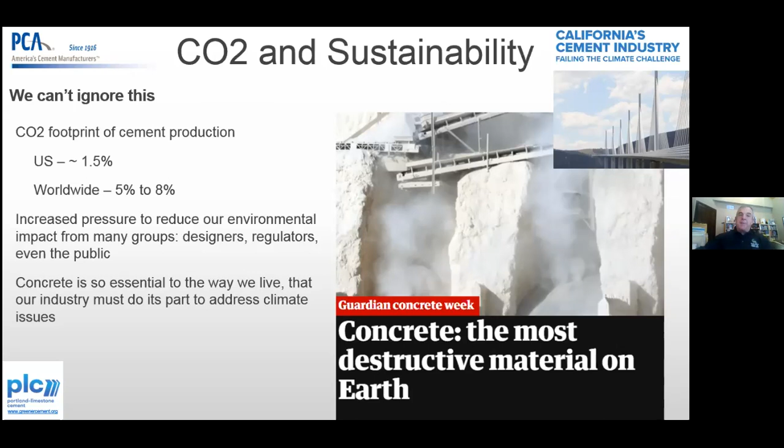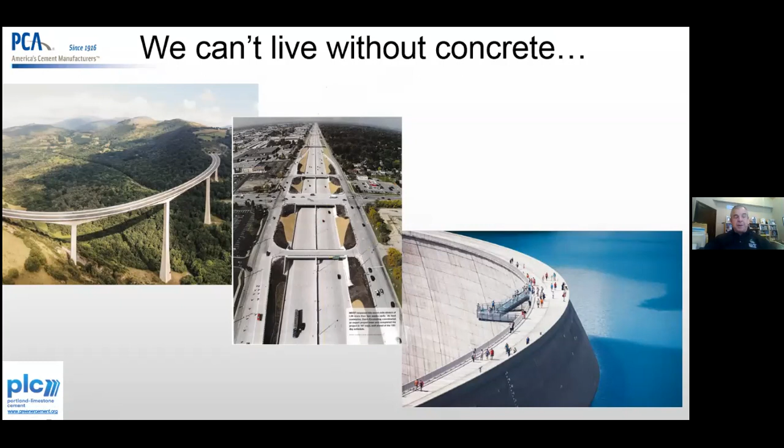The problem is we can't really live without concrete. Concrete frames our infrastructure, concrete frames our homes, concrete's resilient, it's durable, it carries our water, it carries our sewage, it provides comfort, and we need concrete. It's an essential building material that, as the story goes, is the second most consumed material on planet Earth per capita. So we have to do something about it.

In 2018, the Global Cement and Concrete Association was formed in London, the UK. It's a group of companies, and I'm going to show it in a second. We realized that we're part of the problem. We're also part of the solution, and we're confident that we can achieve this global commitment.

The global commitment basically says that we're going to continue to drive down the CO2 footprint of our operations and products, and deliver society carbon neutral concrete by 2050. It's only 30 years away, and of course carbon neutral means zero carbon. I'm going to show you the pinwheel in a second, but it's across the built environment value chain, which means it's in concrete, it's in structures, it involves a circular economy, and it goes through the life cycle of the building.

Just as a quick comparison, anybody with a wooden deck compared to a concrete driveway, you don't do anything to the concrete driveway or deck. But you have to resurface and most often replace the wood deck, and it only lasts 10 to 15 to 20 years, whereas your pavements and slabs are going to last 50 to 70 to 100 years. So you have to take it across that metric, across the life cycle of the concrete, and recognize that it's not cement we're putting down, it's concrete.

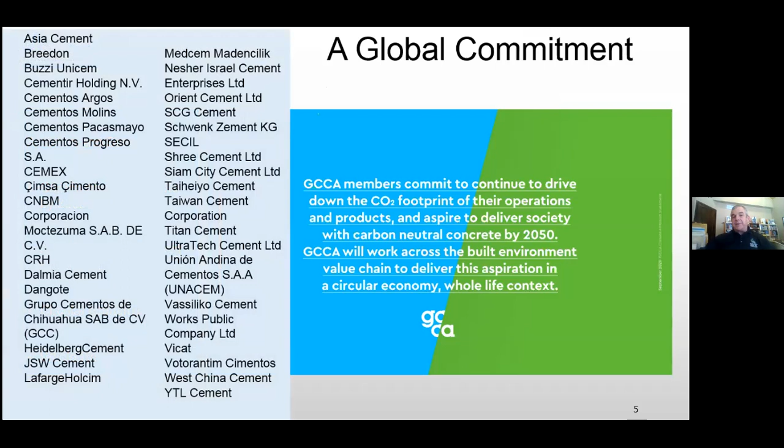So we framed it out. CEMBUREAU, obviously in Europe, GCCA started in Europe, and they framed it out in what we call the 5 C's. So we call it cement, concrete, construction, and clinker. Actually, we break it out into clinker, cement, concrete, construction, and then carbonation is broken out separately here in North America. These are the 4 C's, I guess, then.

So in clinker, I'm not going to dwell on it, but we've got thermal efficiencies where we can achieve certain numbers. We've got low carbon clinker, biomass fuels, decarbonated raw materials.

Carbonation construction is basically using higher performance concretes to get lower masses of concrete in structures, to use less. Concrete can be improved by concrete mix designs, moving from prescriptive mix designs more towards performance mix designs. The NRMCA is basically working hard to achieve this and to convince specifiers that that's the right way to specify concrete.

And of course, on the cement side, we've got our work cut out for us. Clinker substitution is the biggest, it's the lion's share of the reduction that we need to go from, and the baseline is 1990 emissions of 783 kilograms of CO2 per ton of cement. Up to this point, to 2017, which is where they're starting from to get to their 2030 numbers, we've already achieved 116 kilograms per ton reduction in CO2.

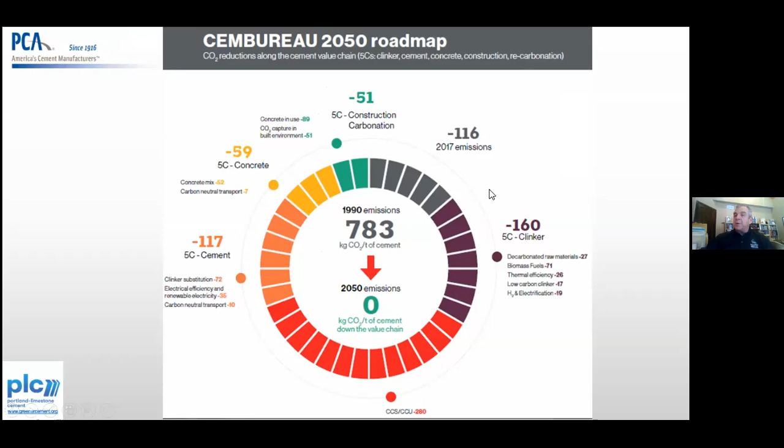So they broke it out, and right now we're adopting a 2030 target, so 10 years from now, we have a benchmark to get to. Similar things are going on in North America. Same framework is happening at the Portland Cement Association, and we just started earlier this week with the Cement Association in Canada and the National Research Council in Canada. We're going to follow a roadmap very similar to what CEMBUREAU is following.

Again, this is still CEMBUREAU's roadmap, but they say in order to get to zero by 2050, they have to get to 472 by 2030. The way they're going to achieve that is through clinker, cement, concrete, and carbonation, recarbonation, and construction. My discussion today, my conversation with you, is basically about cement, and 2/3 of that is through clinker substitution.

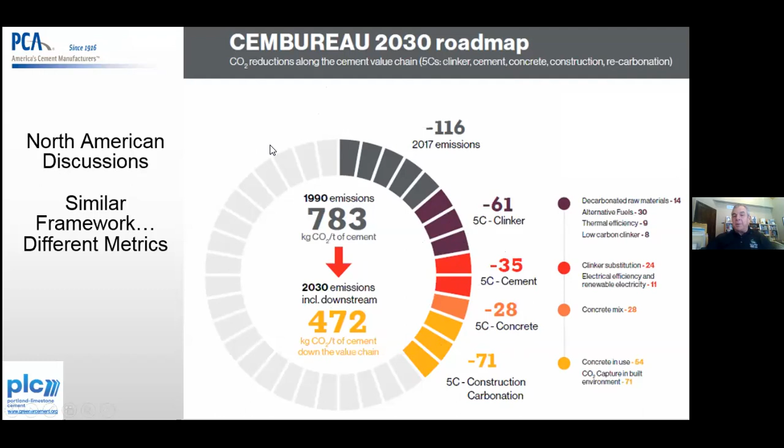The rest is going to come through electrical efficiency and renewable energy at the cement plants. That's in Europe, that's their job. We're coming up with the numbers we need here in North America, but we know it's going to be a challenge. So a lot of us know right now, to get from this point to this point, baseline to low carbon binders in concrete.

Because it's concrete that we're talking about, right? It's not cement. You don't place a cement driveway, you don't place cement walls, you don't place cement slabs, you place concrete. Concrete is the material where we have to consider the end use. And so this is the point where we're at right now.

Right now we use supplementary cementitious materials to replace Portland cement in concrete. So what used to be the baseline of 384 kilograms carbon dioxide per equivalent cubic meter, we're reducing that by using supplementary cementitious materials, fly ash, slag, for example. But we can achieve another 10% reduction of the embodied CO2 by using Portland limestone cements.

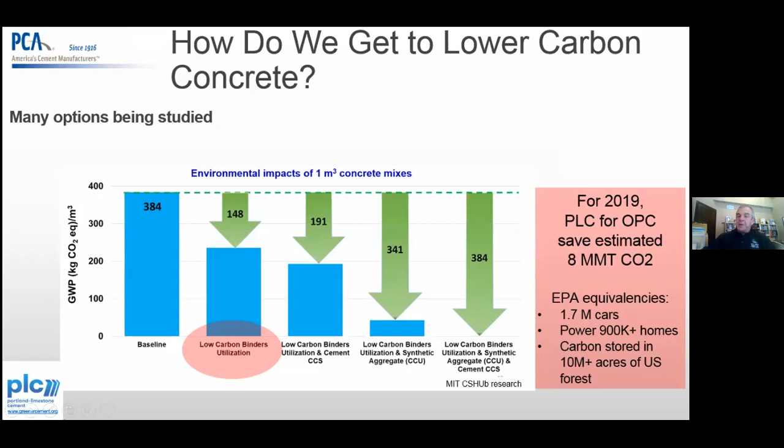So in Portland limestone cements, I'm going to explain in just a minute, but in 2019, if we were to utilize Portland limestone cement instead of ordinary Portland cement, we would have saved 8 million metric tons of carbon dioxide, which is equivalent to 1.7 million cars off the road, enough to power 900,000 homes, and it's basically the carbon stored in 10 million plus acres of US forest.

So I mentioned earlier on that we shouldn't use the metric for cement. Cement obviously has a higher embodied CO2. If you look across this one on the left axis, or the vertical axis, you'll see that it's almost a 1-for-1 ratio, a ton of CO2 per ton of cement produced.

It's actually 0.85 or 0.83, the industry average that was calculated a few years ago, 5 years ago, and we're looking at redoing that right now. But when you look at it compared to timber, we embody less energy, but we have a higher CO2 footprint, embodied footprint. Compared to asphalt, it's about the same as far as embodied energy goes, but again, because of our process, we have a higher embodied carbon footprint. Still much less than plastics, bitumen, glass. Steel is, you know, highly recyclable now, so it's viewed differently now, but it's not bad as cement.

And the story really is in concrete, where once you place it with aggregates, cement only forms 15% of the concrete mix, then your embodied CO2 drops dramatically and your embodied energy drops dramatically. So we do have a good story to tell, but it goes to the total amount of material that's used. And because we're the second most consumed material next to water per capita in the world, you multiply it by the sheer numbers, the amount of material consumed, and that's why you end up with the black eye that we're getting.

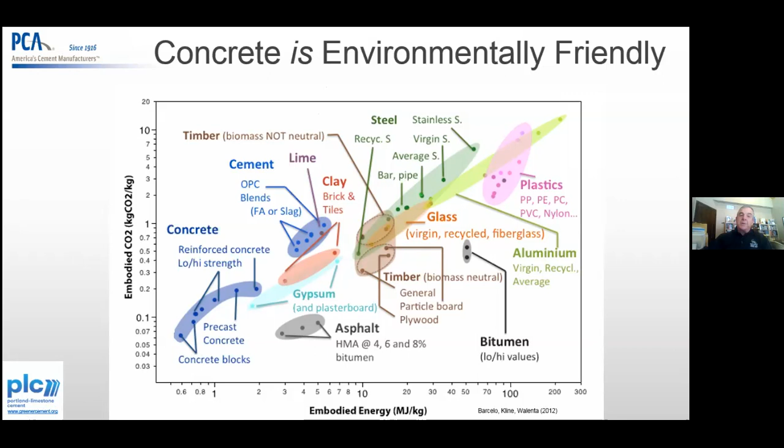In the United States, we have several standards governing cements: type 1, type 2, 3, and 4. For blended cements, we have Portland Pozzolan, Portland slag cement, 1P, 1S, Portland limestone cement, and the ternary cements. They allow for pozzolan, slag cement, and limestone. So blended cements is really where 1L resides right now in specifications.

Hydraulic cements, the C-1157, was purely a performance specification developed years and years ago. It permits the use of several different materials—pozzolan, slags, limestones—but doesn't specify the chemical constituents or prescriptive requirements of the other two specifications. It really is more of a performance specification, and hasn't really been adopted or embraced like people had hoped.

So it still resides in the specifications, but it's not really used all that often. C94 really has equal recognition of all the cement standards. And then, of course, there are separate supplementary cementitious material specifications, ASTM C618, for example, or C989 for slag.

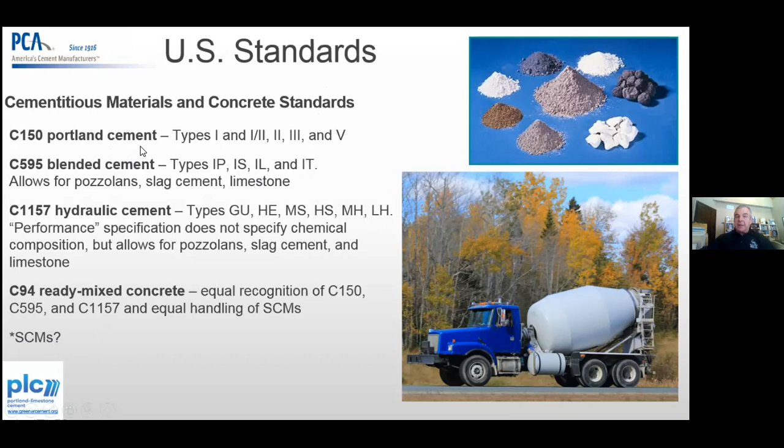The blended cement specification has been around for a long time, over 50 years. C150 has undergone quite a number of changes over the past 20, 15 years. In 1992, 1157 came out with the first attempt to come up with something more environmentally friendly, and it still hasn't gained traction. Portland Cement has made some changes in the C150 realm.

In 2004, we were able to add up to 5% limestone addition. In 2007 and 2009, some changes for inorganic processing additions were recognized, where you can use slag, fly ash, or other materials, whether organic or inorganic—but just addressing inorganic—you can add up to 5%.

So with limestone addition, with inorganic processing additions, each being at 5%, your gypsum being approximately 3 to 5—let's just ballpark it at 5—your clinker factor went from 95 to 85, and it's still not good enough to get where we need to go, unfortunately. And as I said, blended cement's been around for a long time, since 1967, so almost 50 years.

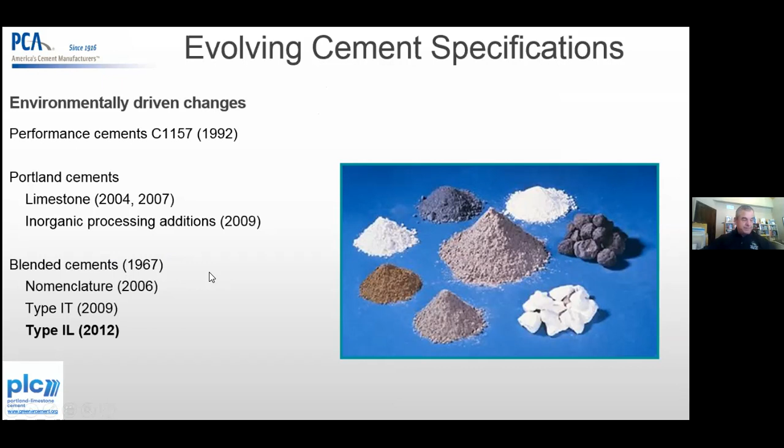So Portland limestone cements, it's a blended cement with additional limestone content up to 15%. Right now the Portland cement specs and the blended cement specs permit limestone up to 5%, but your Portland limestone cement is up to 15%. And it's a quick way to reduce the carbon footprint by 10%.

It's suitable for buildings, bridges, pavements, geotechnical applications. And it is becoming more available throughout the US, and right now it's readily available coast to coast. In Canada, it's pretty well almost the dominant cement. I think just this past year it surpassed it—we don't have the statistics on it yet, but that's kind of where we're at.

The Portland Cement Association actually has come out with a website called greenercement.org, www.greenercement.org, where it has some background information, some field tests, some calculators—well, I say calculators, it has some background information. It has the information we hope will enable you to promote the product and use the product better.

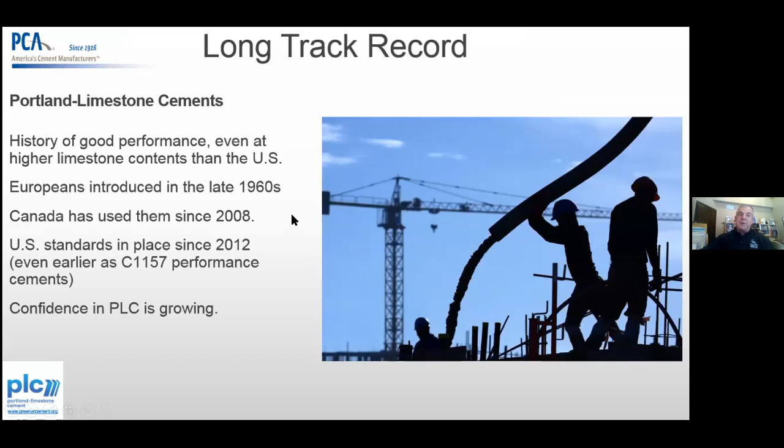Canada adopted it in 2008, so it's been in place for about 12 years. The U.S. standards put it into play in the specifications in 2012. Some of you may know it was actually marketed as an 1157 prior to 2012, for about 10 years before that, probably in most Western states. An IL cement was sold as a GUL, or I believe a GU performance cement, and marketed for a number of years, but now it's found a home in C595.

Going back to the Canadian exposure to it, it came in 2008, and again in AASHTO and ASTM in 2012. AASHTO and ASTM are harmonized these days, so it's pretty well one for one.

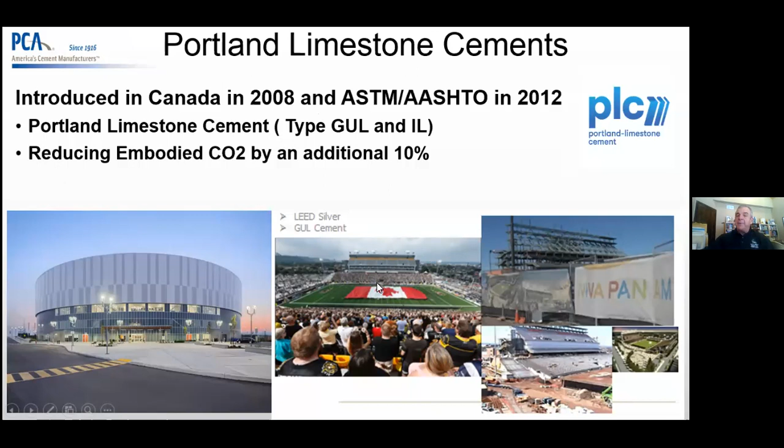Here you've got a couple of projects done in 2015, seven years after the introduction of Portland limestone cements in Canada. You've got the Mattamy Velodrome on the left. Both were LEED silver projects, mandated to be LEED silver. To get that, they needed to meet certain requirements, but they also wanted to have GUL cement used as the sole cementing material in the project. The first was the Mattamy Velodrome for the Pan Am Games, and the second is the Toronto Football Club, TFC Stadium, also constructed with GUL cement in 2015.

But it wasn't all roses. At the outset, we had concerns. Just because it's done in Europe and South America doesn't mean we're willing to accept it in Canada. As cement manufacturers and concrete producers, we had to make sure we were doing the right thing. We wanted to make sure that if we're promoting this product, it's not going to give us a black eye. We wanted to make sure it was going to perform.

We wanted to make sure it was going to be freeze-thaw resistant, and that we were doing the right thing by making it and promoting it. So we had to do our own work. One of the things we did, Professor Hooton at the University of Toronto proposed a field site.

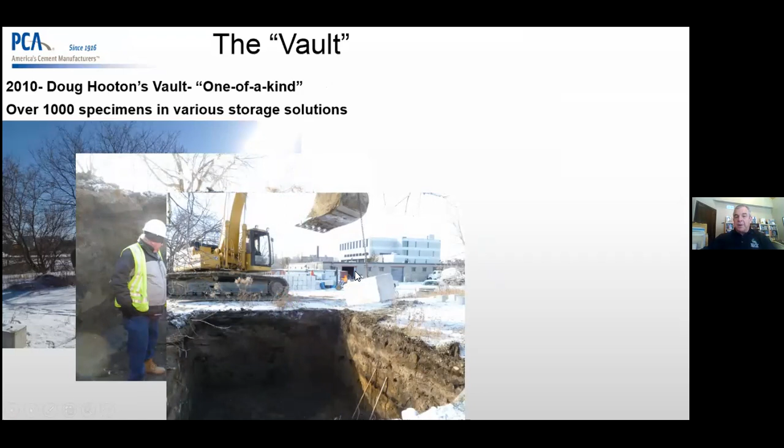We offered up the field site to them. We brought in an excavator—that's Doug on the left here with a couple of his students after the hole was dug. We put blocks in, lined it with blocks. That's the Toronto office in the background. They gave us a little piece of land here right by the railroad tracks, real nice of them.

But anyhow, we made it work. We lined it with blocks, put some framework in there to make sure the material was protected from above. Doug and his students ended up putting over 1,000 specimens into this storage field site, the vault, as we call it. He has several different specimens.

This went on starting in 2010. He's got specimens in there that are in calcium chloride solution, sodium sulfate solution, and magnesium sulfate solution. Doug is a big durability expert on sulfate deterioration and damage, and alkali-silica reactivity too, but that wasn't conducted here. He wanted a long-term storage site, so we provided it to him.

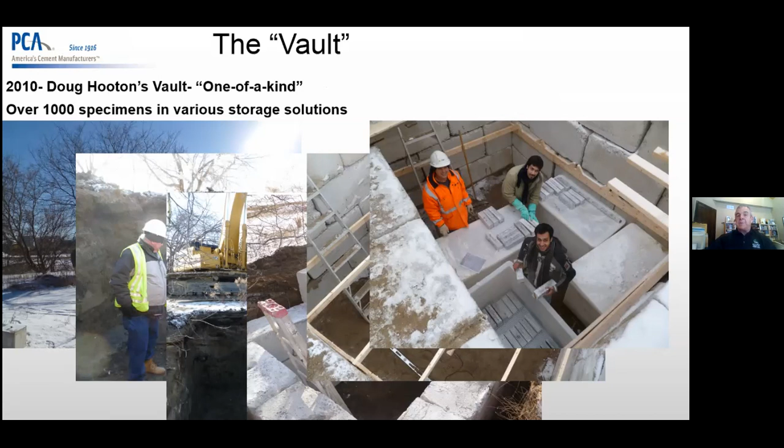The only thing we need to do every year is bring the loader and forklift out and bring these specimens in once a year. Doug has his students measure them and they put them back in. We've got specimens at 0.4, 0.5, 0.6, 0.7 water-cement ratio, different levels of fly ash and slag, in different storage solutions—it's one of a kind. There's nothing else like it in the world, and it's been going on for 10 years. Then we just cover it back up every year until we have to open the tomb up again the next year.

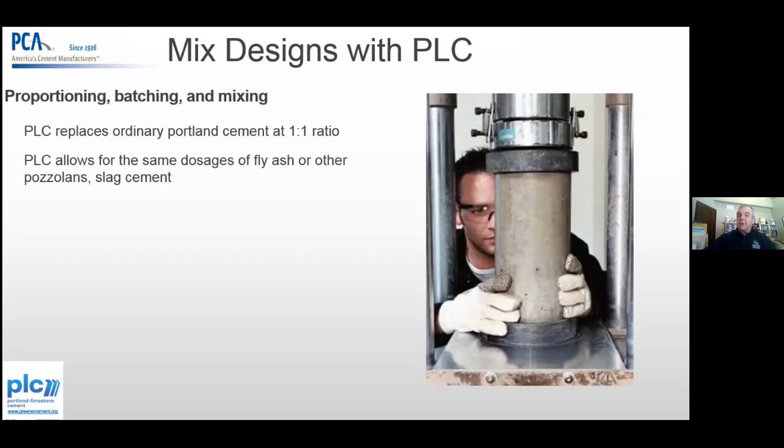So far, and I'll get into his results in a little bit, mix designs with PLC—everybody asks us, what do you do? Well, our experience, which we verified, is that you just replace ordinary Portland cement at a 1-to-1 ratio. There's no compensating for anything else. We've discovered you can use the exact same replacement levels of fly ash, slag, or other pozzolans without issue.

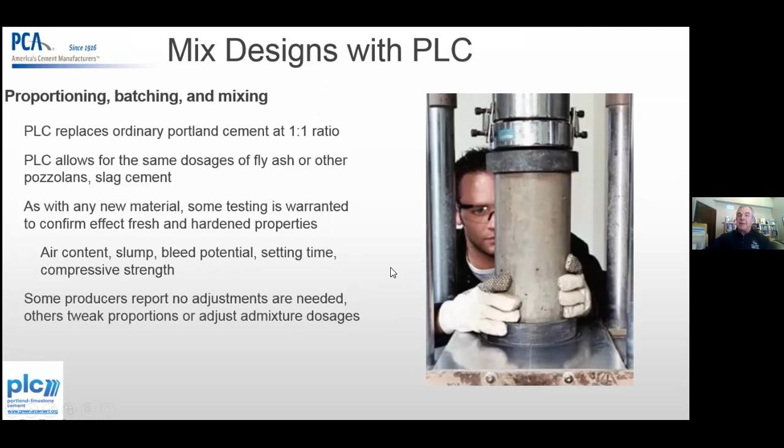Just like with any material, if you change a cement source, or a slag or fly ash source, you've got to do your testing—air, slump, bleed, set time, compressive strength—to make sure everything is dialed in. But typically if you're on one source of material and convert to another source that's PLC, there shouldn't be an issue. Most producers have reported no adjustments. We've heard from some that there might be a slight admixture dosage adjustment for slump, but other than that, it's been a flawless sort of change.

But like I said, it took years to do it. We had to build that field exposure site, do a lot of test pavements, a lot of barrier wall, flat work, sidewalks. We did a whole bunch of demonstration projects to convince ourselves that it's the right thing.

Typical effects on fresh and hardened properties, workability.

Okay, do we take questions afterwards, or Dan, right? I don't know if there are any questions or not, but no questions right now. Okay. If you get any, feel free to interrupt if you want. I'm okay with that. Sure.

Okay, on fresh and hardened properties, just on workability, there's no significant difference. Bleeding: because there's a higher level of fines, since limestone preferentially grinds finer than the Portland cement clinker, you have more fines in it, and you might get a little less bleeding.

But most people say that the workability is enhanced by that. It appears like there's less bleeding and less workability, but once you start working it, it finishes even better, they say. Set time: there might be a slight decrease, only because you're optimizing your particle packing and fineness, with limestone fines filling the gaps between Portland cement particles.

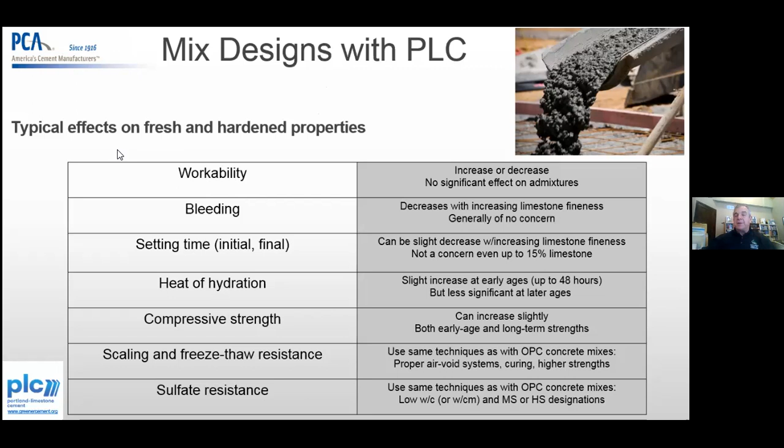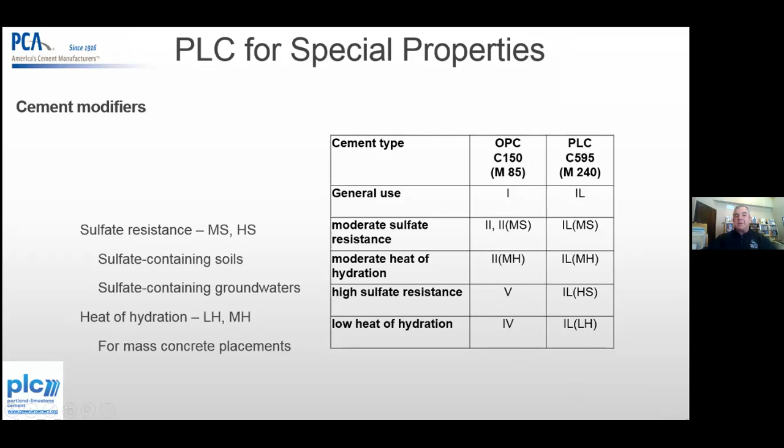The specifications actually allow you to use a IL cement as an MS as well - moderate sulfate resistance, similarly to a Portland cement - and you can have high sulfate resistance just as with ordinary Portland cement, or low heat of hydration, IL(LH), similar to a low heat of hydration type 4 cement. Same thing with moderate heat too. So the performance specifications in 150 can be matched with similar performance specifications in 595 or M240 for AASHTO.

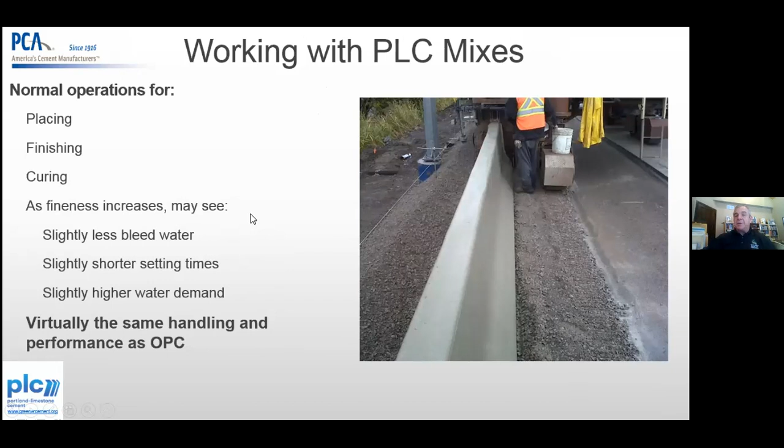The other thing for placing, finishing, curing, as I said before, the handling is really the same. There's really no difference between ordinary Portland cement and PLC in concrete mixes.

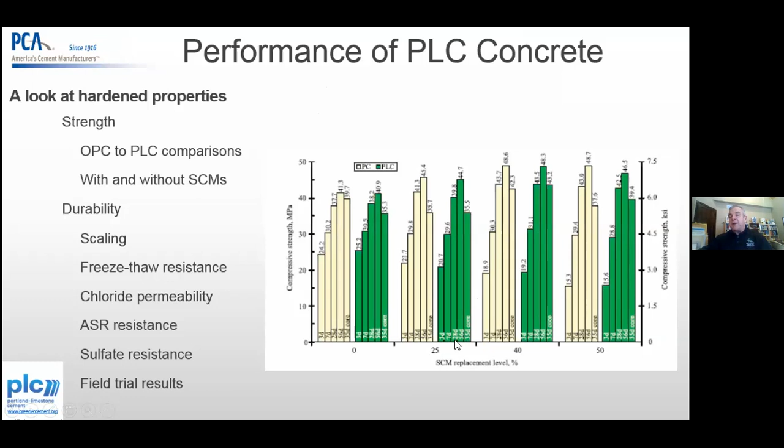I think they're 91 days, maybe it's something else - I can't really read that - but it's similar across the board for 0 replacement, 25% slag, 40% slag, and 50% slag in this particular graph.

I wouldn't hang my hat on the fact that you're going to get increased strengths all the time. My experience has been you get equal performance. This is basically saying that you're getting equal performance - it just so happened in this particular test that Portland limestone cement performed better than Portland cement, which you might find, but it should be equal. That's our goal - to grind them and optimize the intergrinding and gypsum addition to maximize efficiencies in the mills and maximize limestone content, but still get equal performance.

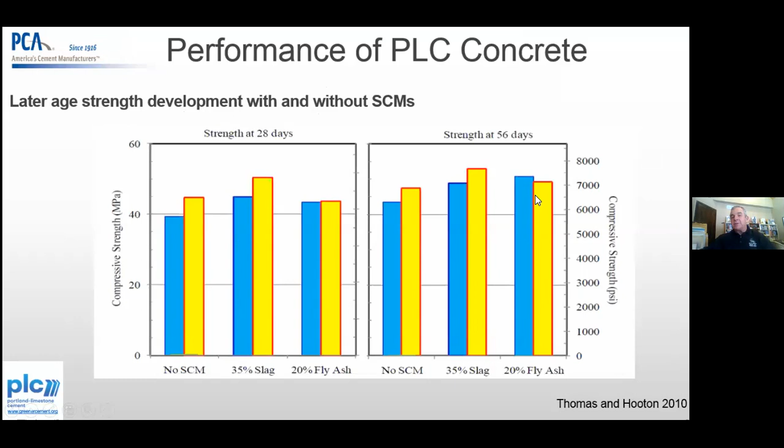At later ages, the same thing happens - you've got equal performance, for no SCMs, 35% slag, and 20% fly ash. At 56 days, the same thing: increased performance for Portland limestone cements, and for the 20% fly ash, just slightly diminished in this particular one at 56 days.

Permeability, the C1202 or the T277 test. Without SCMs, you're going to get higher permeability numbers, always, because of the pore solution, your calcium hydroxide pore solution. That's known. But once you start adding pozzolans or supplementary cementing materials, you end up reducing your permeability to levels where you can meet specification requirements.

So at 28 days, it's comparable at 35% slag, below 1,000 coulombs for this test. This is at 0.45 water cement ratio. What was 2,500 coulombs is now below 1,000. And with the 20% fly ash, it's about 1,250 and 1,400 coulombs with the PC and the PLC.

At 56 days, it doesn't really drop that dramatically for the non-SCM mix. Water cement ratio obviously plays a part in that, but just by adding in some supplementaries with PLC and with OPC, you get the same thing. You get equal performance and permeability mitigation.

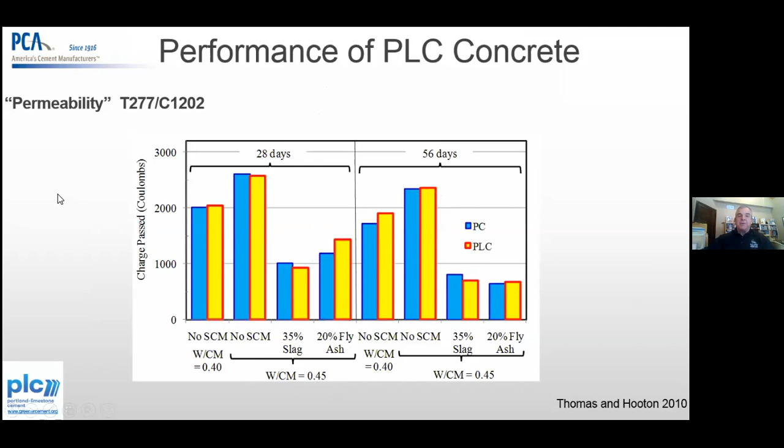Scaling resistance, they're equal. In this particular case, the one with PC and slag actually had higher scaling or slab defects, and the one with PLC had slightly less. And of course, they're all well below the mass loss limit anyhow. I believe it's 0.8 and 1 kilograms, so 1,000 grams and 800 grams is the limit for 50 cycles of exposure. And with the fly ash, same thing with the PC. That one particular worked a little bit better than it did with the PLC for this fly ash, but still they're well below the limits permitted in 672.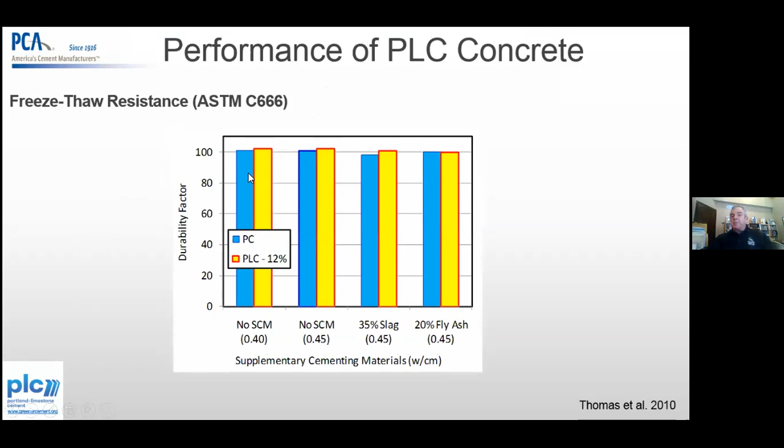This was just a 1-year shot. I don't have the update for this, it's like 10 years ago. Actually, this trial by Hooton and Thomas was done in Quebec in 2005, even before it got into the specification in 2008 in Canada. It was done in Quebec, and that pavement's been down, with no reported issues.

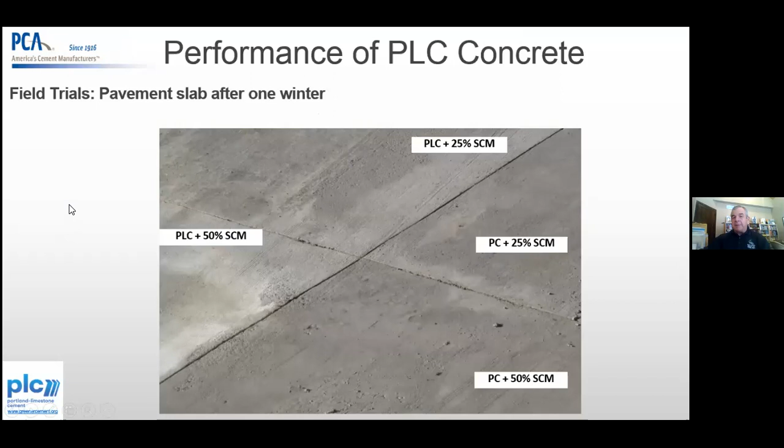Portland cement, and they basically just kind of abutted against one another. Portland cement and 50% slag, PLC and 50%, PLC and 25%, and PC and 25%, and no scaling issues whatsoever. Anybody who's been to Montreal knows they get freezing rain, they get cold, they get snow, and it can be pretty nasty sometimes.

And then ASR resistance, you get good mitigation with your concrete prism tests, your accelerated mortar bar test, and your accelerated concrete prism test, which they were trying to promote at one point, it's still in the research stages, but equivalent performance in ASR as well.

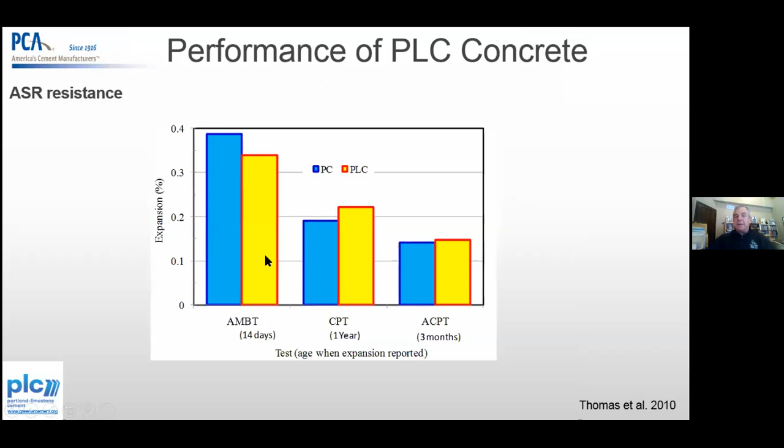This is for, I can't read that stupid thing. Hang on a second, stop it. I'm gonna go back, I can't read what it says up top. My screen is... what is that one? Give me a second here. My menu is on top of it and I can't get it off.

It says PLC and sulfate resistance. Oh, sulfate resistance, there you go. That makes perfect sense, because typically, and I showed that already with sulfate resistance, if you put any sort of mortar bars or paste bars into a sodium sulfate solution, it's going to skyrocket. They typically do take off, whether it's Portland cement or Portland limestone cement. But once you start adding supplementary cementitious materials that consume the calcium hydroxide in pore solution, you just get it flatlines, and you get below the maximum required to demonstrate that it's resistant to sulfates. That was the reason why Doug wanted the field site in the first place, was to demonstrate his big concern was sulfate performance and sulfate resistance.

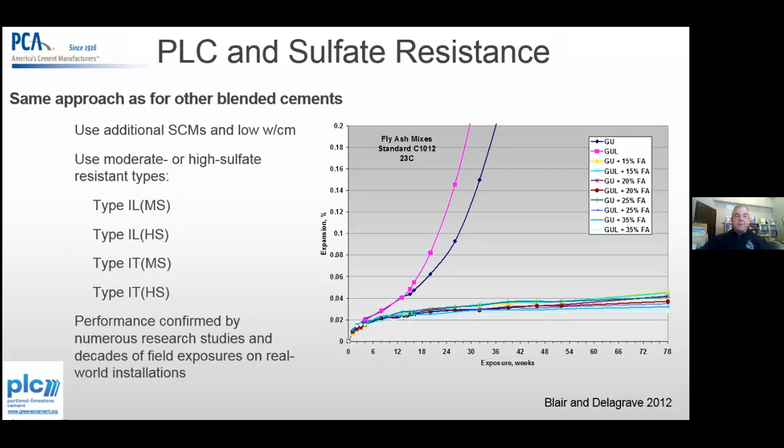And basically, how do you order it? Is it available? The only thing, again, I said, and it's true, it's just a replacement of 1-to-1 OPC with Portland limestone cement. Same suppliers that you use for your ready mix operations now, same delivery placing equipment, same pneumatic tankers, et cetera. The only thing that we had as an issue was logistics. You've got to get it from the plant, you've got to separate it out, you've got to get it to the terminals, or you've got to get it to your customer who needs a separate silo for it.

We have co-shipped product with both products. Portland limestone in one load and Portland cement in the other, and they co-shipped the same job because they had to, they had no choice. And at the end of the day, the concrete finisher didn't even know there was a difference in the concrete. He finished it all, 500 meters from one plant, 500 meters from another, and didn't have an issue with it.

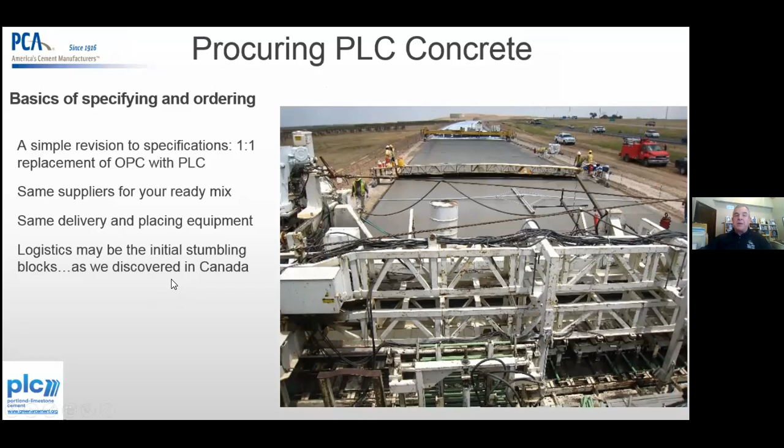So it's really just logistics in separating out the products and making sure that you're sending the customer what he needs, right? So just some simple calculations that I did with our ready-mix affiliate in Canada. They've been the most progressive, although the entire industry is moving that way right now.

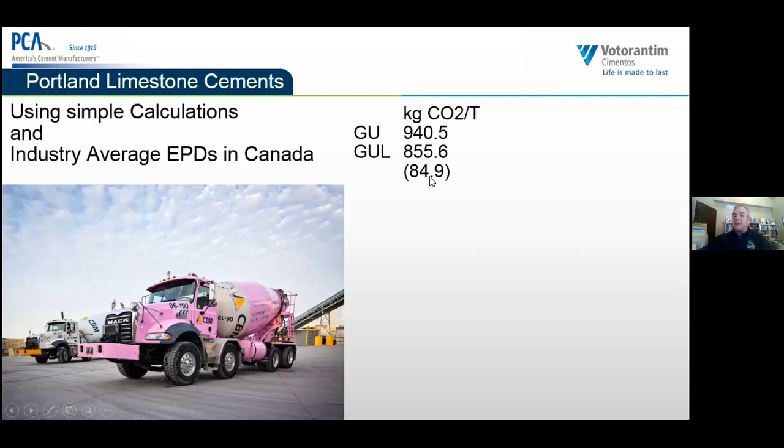If I use the EPDs, Environmental Product Declarations, from the Cement Association of Canada, we did establish an industry average of CO2 per ton for GUL and GU, and the difference being 85 kilograms of CO2 per ton of cement is a differential. I just basically took the numbers that CBM has used over the past 3 years, and CBM in their usage of GUL cement basically saved 6.9 million kilograms of CO2 from going up into the atmosphere.

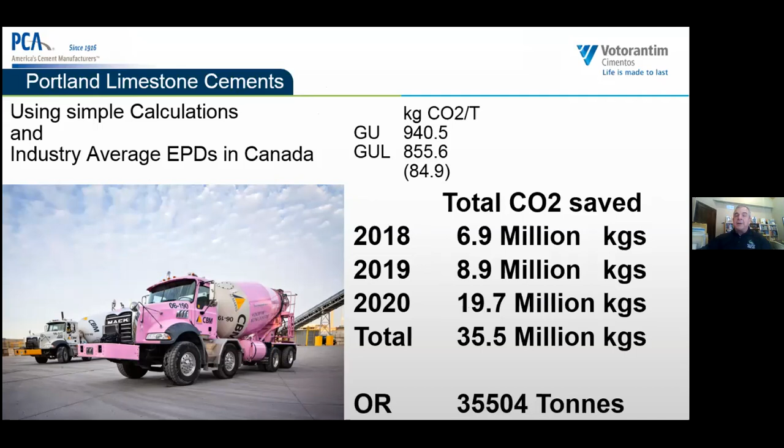8.9 million in 2019, and last year was absolutely stellar - almost 20 million kilograms of CO2 was prevented from going up into the atmosphere. In effect, in the past 3 years, over 35 million kilograms, or 35,000 tons of CO2, was prevented from going up into the atmosphere. And that's just one client, one customer. That demonstrates that hits home.

So we've had some end users actually ask us, okay, if I were to use this material on a particular job, what would I get? So, EllisDon has a project going on - it's the wastewater treatment plant in Hamilton. They use GUL entirely for the project. It's 23,000 cubic meters, or 30,000 cubic yards, with slag replacements 30 to 45. There's a YouTube project update link on this.

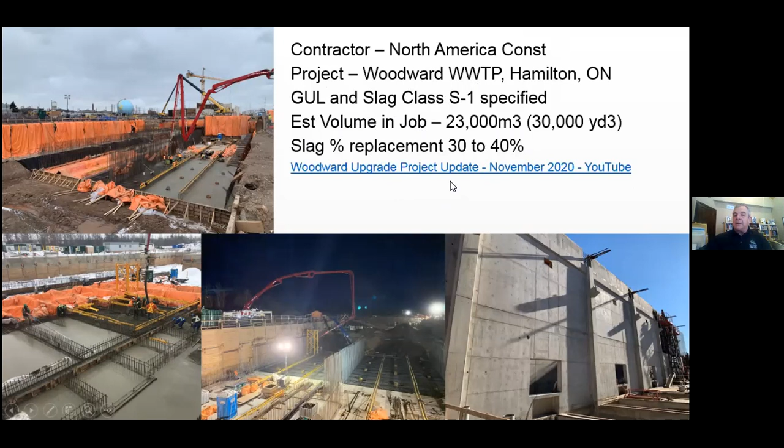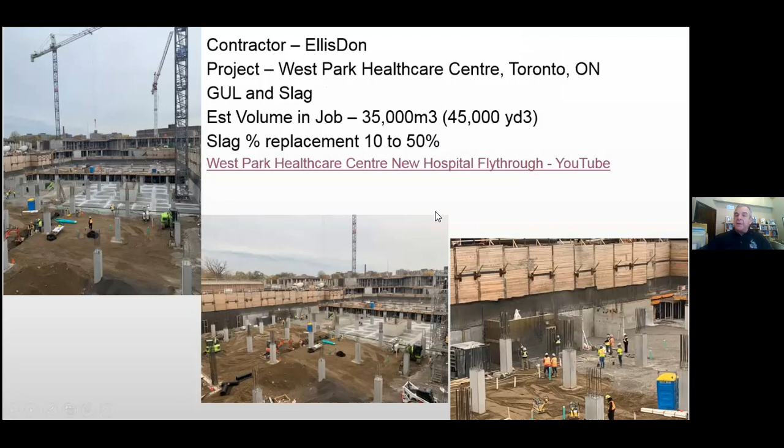Another big project that's going on right now, the healthcare West Park Healthcare Centre. Again, GUL cement with slag, 45,000 cubic yards being used in that one, 10 to 50%, depending on the application where the concrete is going.

So EllisDon wanted to know, hey, if I were to use 25,000 cubic yards in a 5,000 PSI mix, what am I saving by doing this? The Slag Cement Association has a calculator - it's verified, certified. Pretty soon, by the end of this year or the middle of this year, we are going to have everything in one location. I believe the Slag Cement Association calculator is going to have, instead of just Portland cement in it, Portland limestone cement too.

But until then, you got to use two different calculators. I hate to say it. So the guys asked me, hey, if I use 25% slag or 35% slag, what's my carbon footprint?

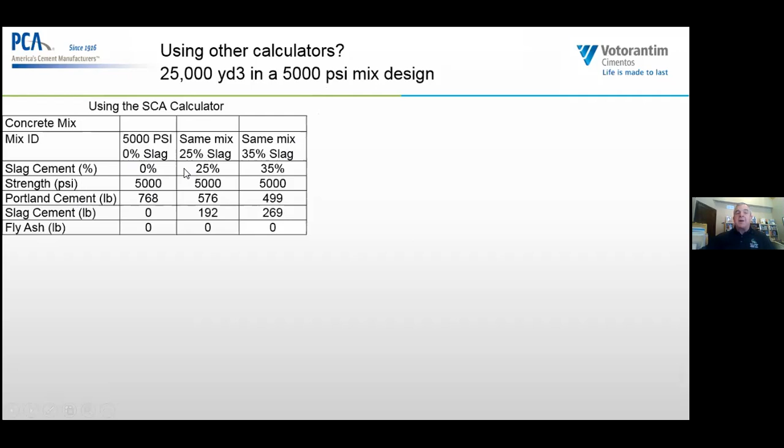The environmental impact is your CO2, your embodied CO2 in this mix with zero slag is 392 kilograms of CO2 per cubic yard. And if you use 25% slag, it's 312 or 313. If you use 35% slag, it's 281 kilograms CO2. We know this one already - everybody's able to use SCMs to lower it.

But what if we were to take that particular mix - this is from greenercement.com, the CO2 calculator, by the way - you can actually see if you use PLC, or replace PC with PLC in your mixes, how much more kilograms will you save? Well, for this particular one, 768, you'll save an additional 28 kilograms.

For this particular one, 576 Portland cement constituent, you'll drop an extra 21 kilograms. And for this particular one here, they're all about 10%, of course, right? This one's about 10%, 18 kilograms. So your 281 drops another 18.

So in essence, you're going from your pure mix, your baseline, to just going to PLC, you drop it by, as I said, 28 kilograms per cubic yard.

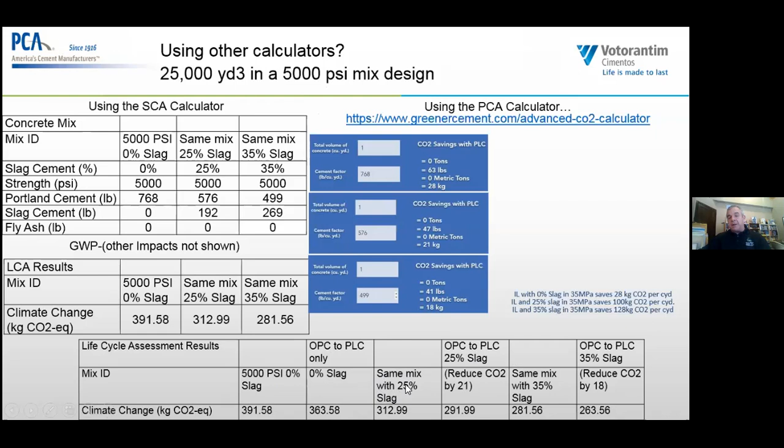In going with slag, you drop it even further. So if you were to go with your mix, your baseline 391, to go to PLC with 25% slag or 35% slag, you basically end up with, in 25,000 cubic yards, you will save 700 tons of CO2. That particular job will get 700 tons of CO2 saved.

25% slag will save, over the baseline, 2,500 tons of CO2. And if you allow the performance specifications to rule, you could go with 3,200 tons of CO2. These are metric tons of CO2 for that project.

So there's another link here, and I'll share this - you're welcome to have this presentation after. But if you go to the EPA equivalent CO2 calculator, which is also on the greenercement.com website, saving 700 metric tons is the equivalent of taking 151 passenger cars off the road for a year.

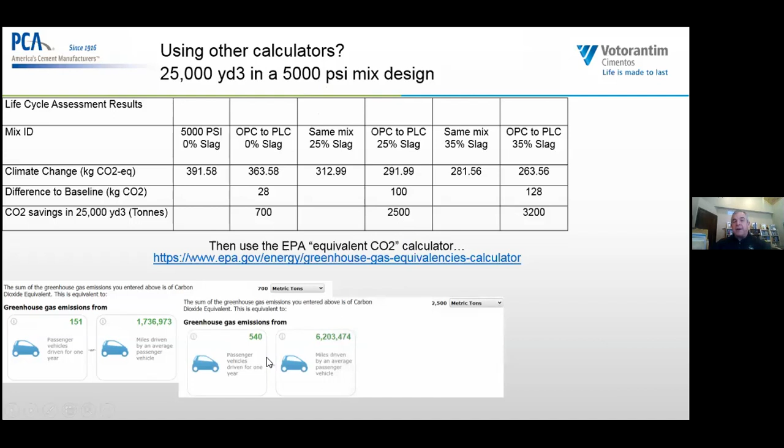2,500 tons is the equivalent of taking 540 cars off the road. Going to PLC, OPC to PLC, saving 3,200 metric tons is the equivalent of taking 691 cars off the road, or driving almost 8 million miles of a vehicle. That's what you save in making adjustments to your mixes and permitting PLC to be used.

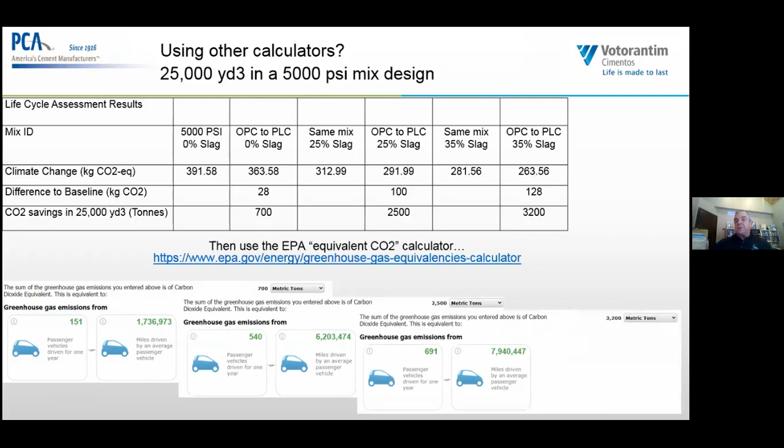Just a few little highlights, some stuff that's going on right now.

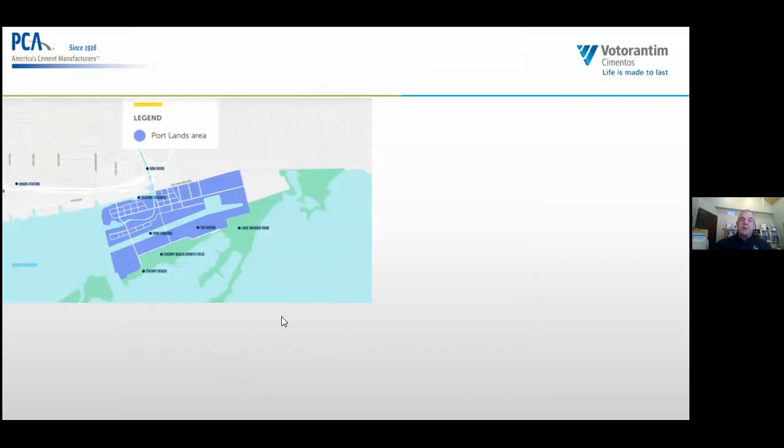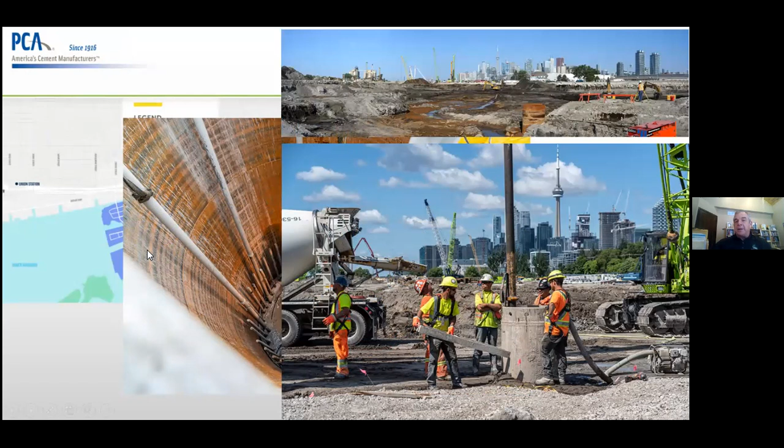There's a big project in the Port Lands area in downtown Toronto on the lakeshore. Everybody knows the lakeshore is a high dollar area, and you'll do anything to make it work and put condos on it. So they do the same thing in Toronto. We're in the process of doing caisson work right now, putting a whole bunch of caissons in this Port Lands area, and that's kind of what it looks like now. The hope is they're actually going to put condos on it, living space, cycling area, keep some wetlands area, some boating area, little retail, commercial, residential, multi-use condos. So what used to be a non-desirable area is going to become very popular, and it's all GUL cement, Portland limestone cement, going into that project.

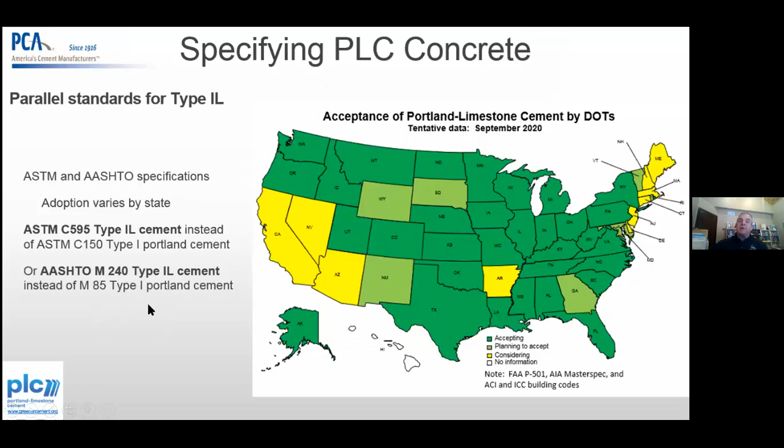As I mentioned, greenercement.org, www.greenercement.org, has a CO2 calculator on the website. You can see the benefits of PLC, it discusses some of the things that I talked about, has case studies, industry partners, and a way to contact an expert—or contact me too if you want. I'm not an expert, but I'll do the best I can. And if you want more resources, there are lots of resources to get you where you need to go.

I think that's it. I'm not even sure how I did for time, but I'm pretty close to the time you wanted me to go, Dan. I'll open it up to questions if anybody has any questions about PLC and its use.